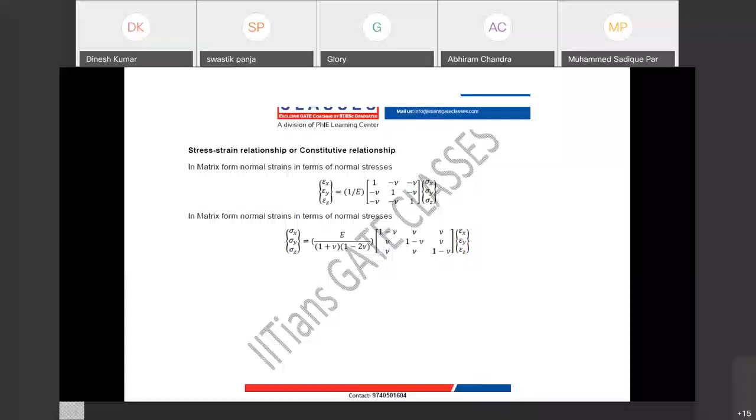Okay, so let's start with a simple topic: stress strain relationship. How many of you are aware of the stress strain relationship, guys? All of you know Hooke's law. What is Hooke's law, guys? Yes, stress is proportional to strain, right? Like sigma is proportional to epsilon. But where is it applicable? It is for 1D loading.

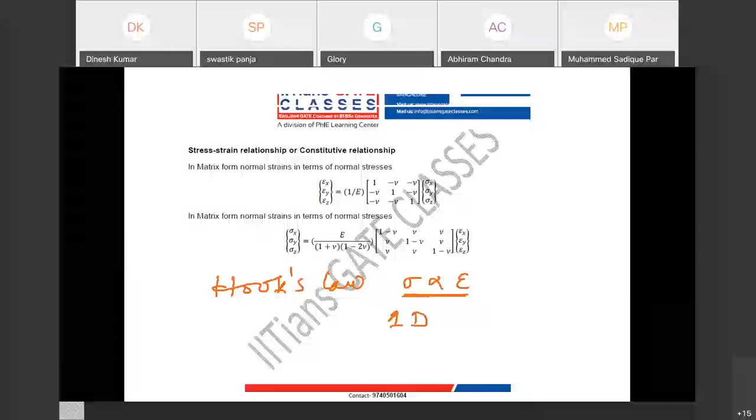Am I correct? From here we find sigma is equal to E times epsilon, right? So what is E here, guys? We are talking about the stress-strain relationship for isotropic material, because from this simple concept they have asked questions many times. Yes, Young's modulus. It's known as Young's modulus or modulus of elasticity. But as I said, this Hooke's law is applicable only for 1D loading.

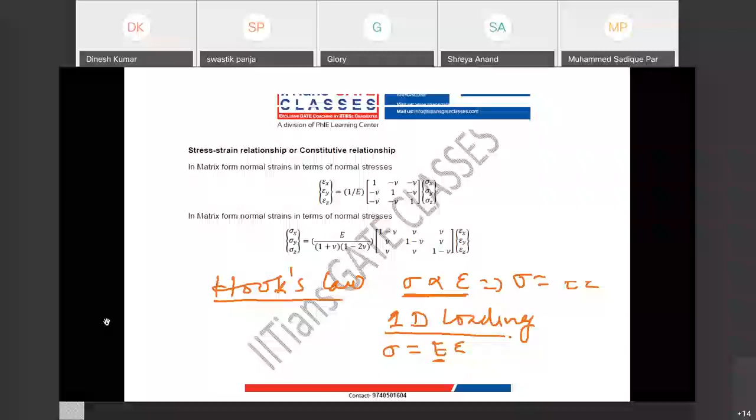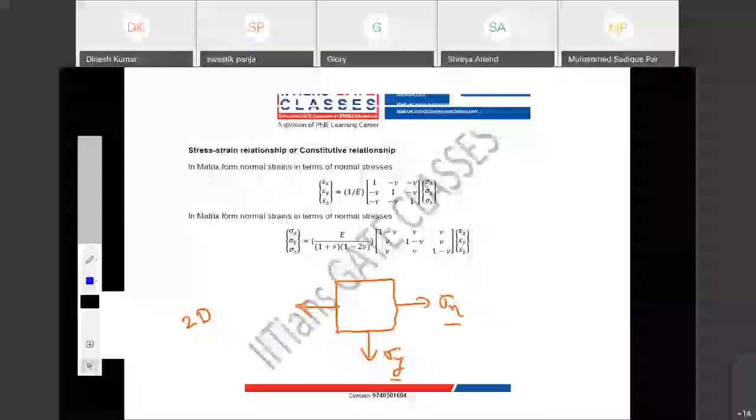Now suppose you have two-dimensional or three-dimensional loading. Then tell me, can we apply Hooke's law? Can I say my stress is directly proportional to strain? Anyone? Abhiram Chandra. No, you cannot, right? I will take one two-dimensional case. Suppose I have one plate subjected to stresses sigma x and sigma y. So I have two stresses, sigma x and sigma y. It is a two-dimensional stress system.

Now in this case, tell me, guys, what will be your strain? Suppose I want epsilon x. Will it be sigma x upon E? Because from Hooke's law, this is what your strain should be. But is it the case? Anyone? Yes or no? No, it is not the case. My strain will be sigma x by E minus nu times sigma y by E.

So there is one additional term. What is the additional term? Due to my stress in the y direction, there is strain in the x direction. Due to what? Poisson effect. Is this point clear? Due to the Poisson effect, I have one additional strain in the x direction due to loading in the y direction. Now tell me guys, why is it negative? Why is it not positive?

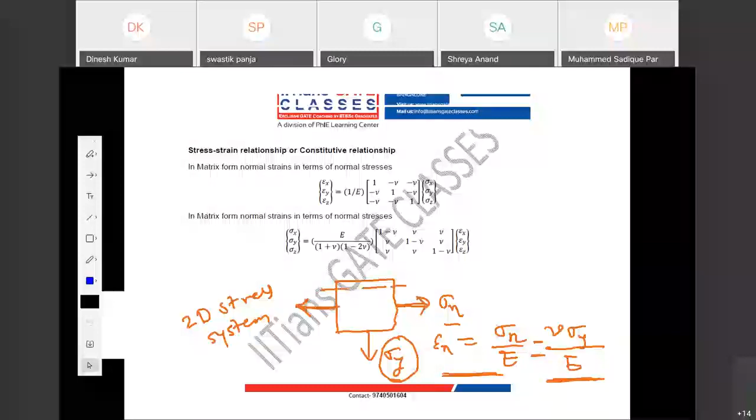Can you understand physically? See here, when I apply this sigma x, it will get extended. That means strain is developed. Now this sigma y will oppose this extension, right? Meaning contraction. So your strain is reduced when sigma y is present. That's why you can see the negative sign here. Is this point clear?

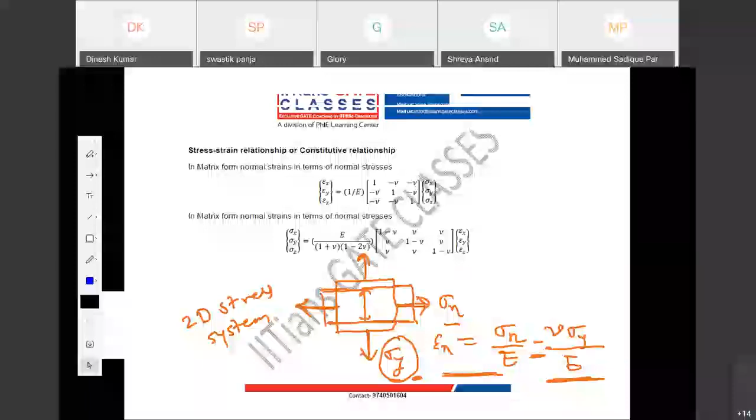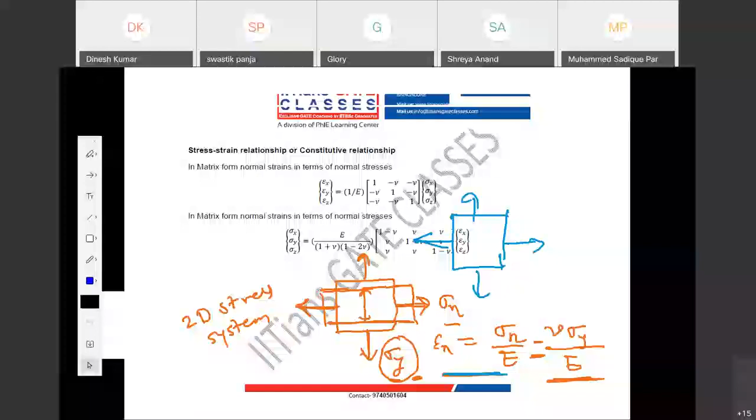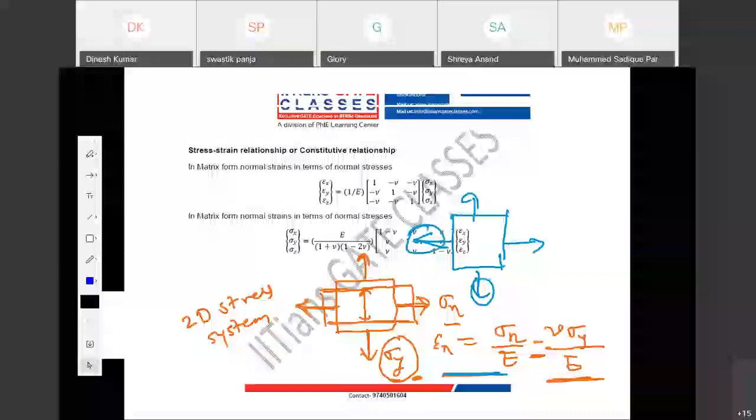So physically also we can understand: when there is a plate subjected to stress in two directions, your strain in one particular direction will be less than if it were subjected to 1D loading instead of 2D. Right? Because this guy is restricting motion in the x direction. So this is our physical understanding of why the negative sign is present here.

So this is how we derive the stress strain relationship for a 2D stress system. This is your epsilon x. Now tell me guys, what is your epsilon y? My epsilon y will be sigma y by E minus nu times sigma x by E. Is it clear?

Is it clear or not, guys? Quickly tell. See, guys, be interactive, okay? We are online, but still interaction must be there, okay? That's how we enjoy, okay?

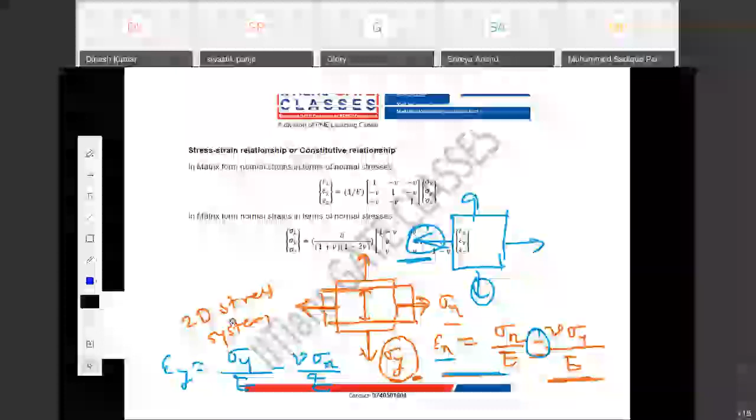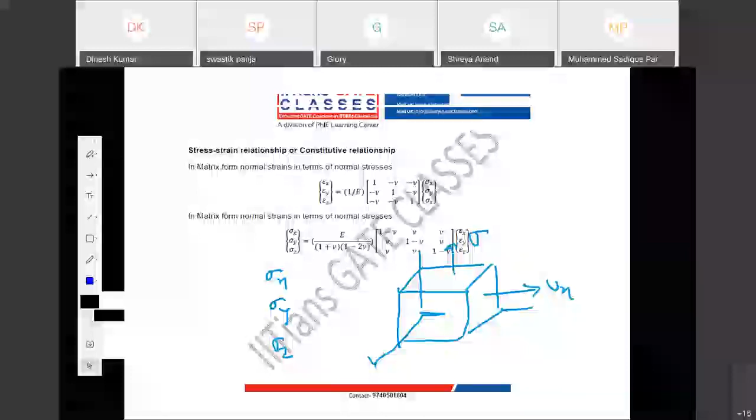So good. Now, this I talked about two-dimensional stress system. Now, suppose my stress system or my loading is three-dimensional, right? If my loading is three-dimensional, that means I have sigma x, I have sigma y, and I have sigma z. How can I visualize? If I take a cuboid, suppose here you have sigma x, here you have sigma y, and on this face you have sigma z, right? Is it clear? The loading part, is it clear, guys?

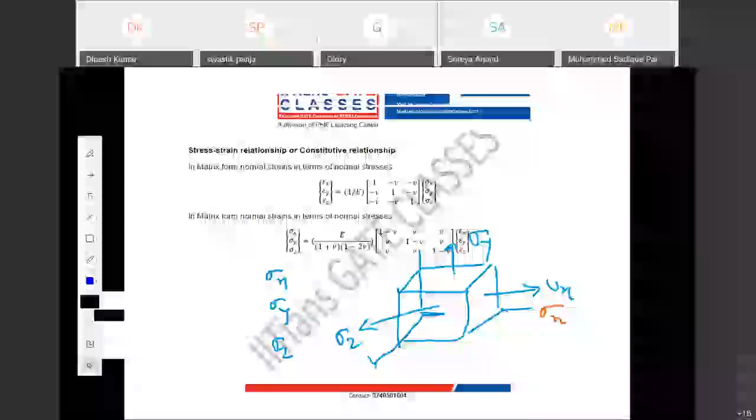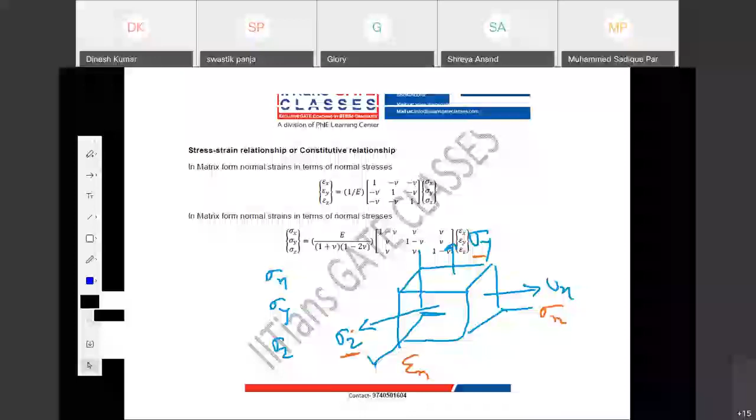You have one stress in x direction, sigma x, I can write here. Then you have sigma z and you have sigma y. Right. So in this case, what will be your epsilon x? It will be sigma x by E. Then due to Poisson effect, you have minus nu sigma y by E minus nu times sigma z by E. Is it clear? Is it clear or not, guys?

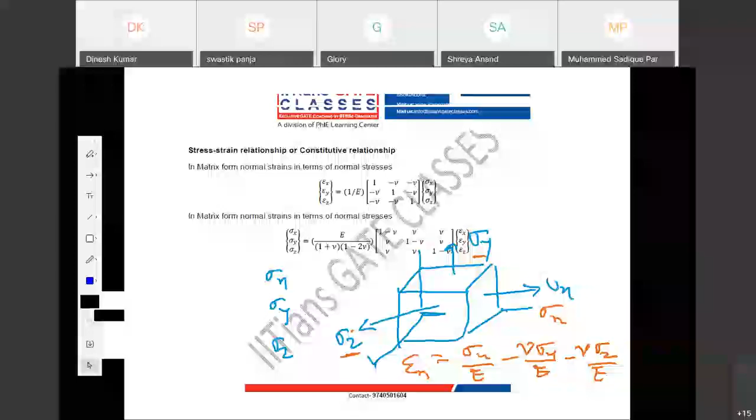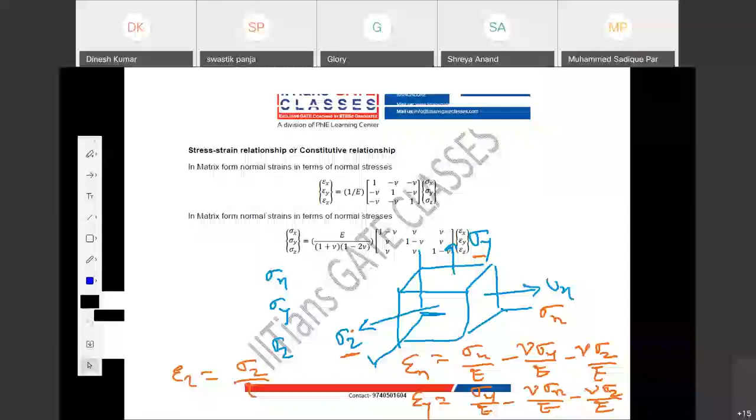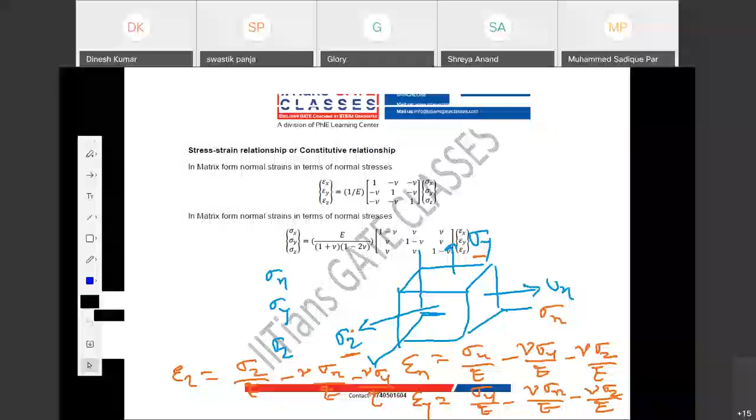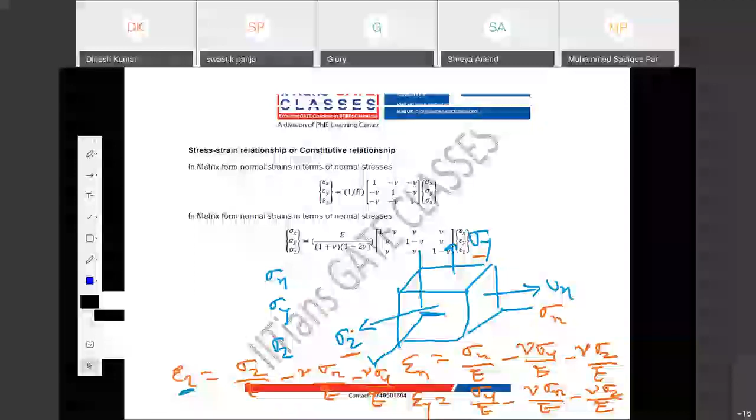Then similarly, I can write epsilon y, which is what? Sigma y by E minus nu times sigma x by E minus nu sigma z by E, and then I can write epsilon z, which will be what? Sigma z by E minus nu sigma x by E minus nu sigma y by E. Is it clear? So I have three strain terms, right? Epsilon x, epsilon y, epsilon z. I can write these three equations in a matrix form. Is it clear?

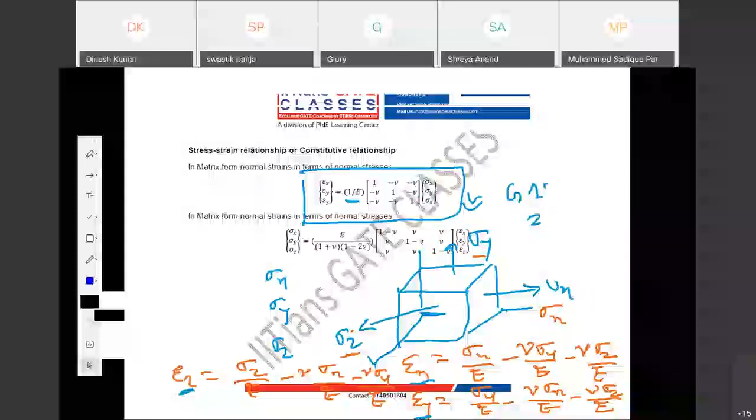1 by E can be taken out. So it is what? 1, minus nu, minus nu; minus nu, 1, minus nu; minus nu, minus nu, 1. Is it clear? Nu or mu is what? Poisson's ratio. So this form is easy to remember. In matrix form, we can easily remember. And in this form itself, in GATE 2020, they asked a question. We will solve that question, okay?

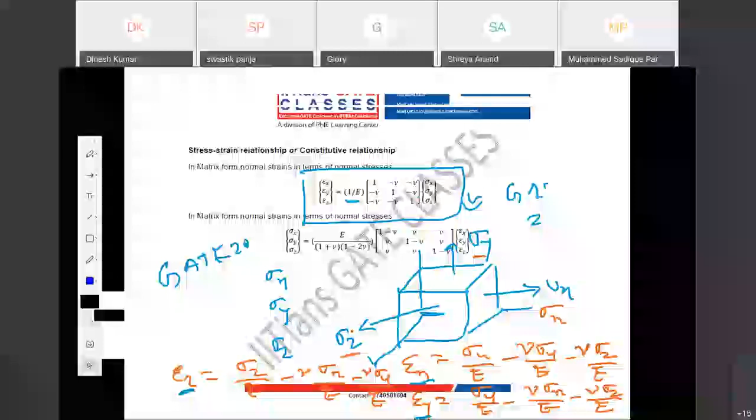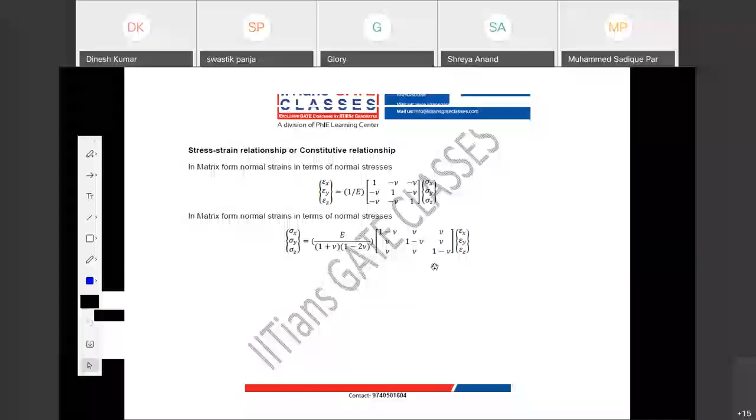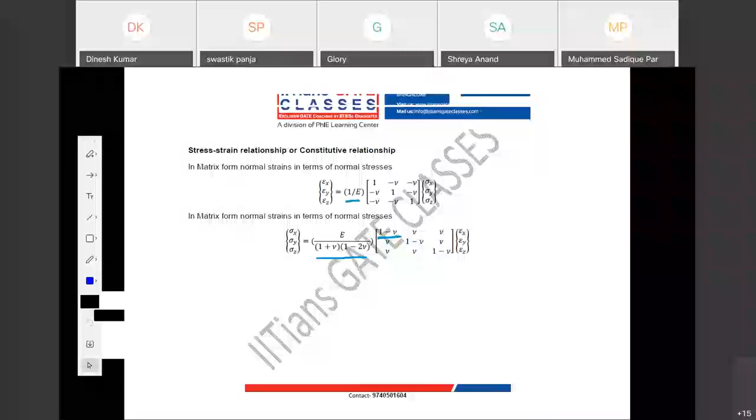Clear? Okay. Now, guys, here what I have done, I have written my strain in terms of stresses. You can write, by taking inverse of this matrix, stress in terms of strain. So both the forms are very important in GATE exam to remember. In this, it is 1 by E. Here, my constant is E upon 1 plus nu into 1 minus 2 nu. Then it can be remembered because again, it's a symmetric matrix: 1 minus nu, nu, nu; nu, 1 minus nu, nu, like that. Okay, so these are the two equations for stress-strain relationship and strain-stress relationship.

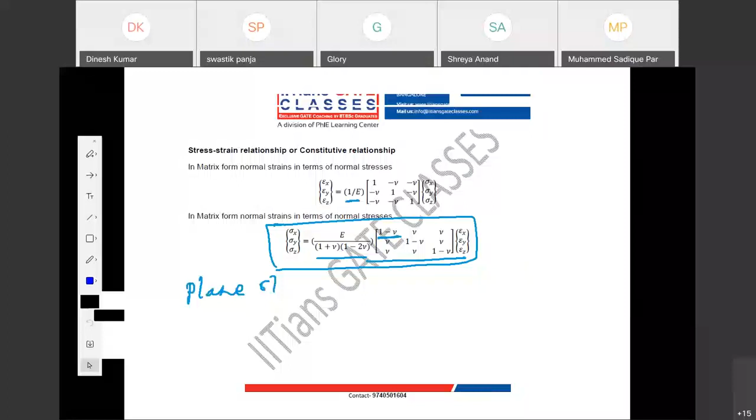So based on this, we have two concepts. One is plane stress problem, and one is plane strain problem. So we have seen questions from these two concepts in previous years' papers, as well as direct questions from this form. Okay, so we will take up those questions.

Before that, if someone asks, why do we study strength of materials or aircraft structures? Anyone? Why do we study this subject in our aerospace engineering? Can anyone answer? What is the significance or importance of this subject? To me, it is, guys, very simple. Your aerodynamics sir will give me loads. Surface loads and body loads.

Broadly, we can categorize loads in two forms. One is body forces and one is surface forces. So body forces are forces due to gravity, or forces due to inertia. What are surface forces? You have force due to pressure or you have shear stresses, right? So what I have to do as a structural engineer, I need to analyze for applied loads whether my structure is safe or not, or my design is satisfying my goal or not.

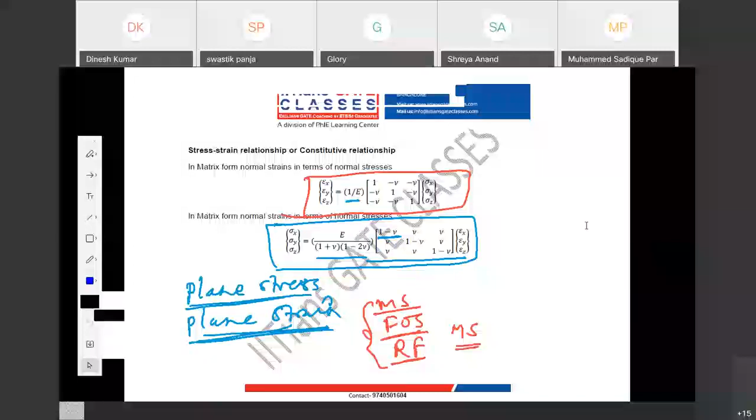Anyone have come across these terms? See, margin of safety is nothing but your FOS minus 1. Factor of safety minus 1 is what? Margin of safety. Yeah, you are correct, Jay Verma. And FOS has to be always greater than 1, or your reserve factor should be always greater than 1. But your margin of safety has to be greater than 0. Okay, so this is the difference.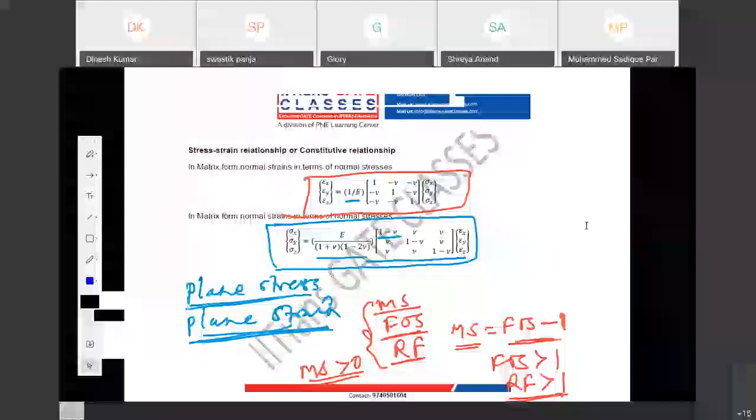Different companies use different notation. So the whole idea to study this subject is to always find margins. Clear? Always check your structure is safe. How do we find safe? We compare our maximum applied loads or maximum stresses, like you might have heard about von Mises stress and principal stress. So we compare this quantity against what? Material allowable. And we find the margins. Clear?

Now here we are discussing stress-strain relationship or strain-stress relationship. So I told from this there are two conditions: one is a plane stress problem and another is plane strain problem. One more thing, guys, we have seen these relations are between normal stresses and normal strain. But there is something called shear stresses and shear strain also, right?

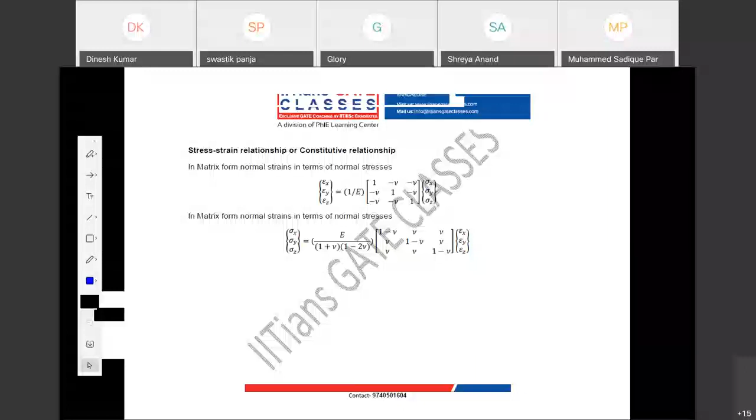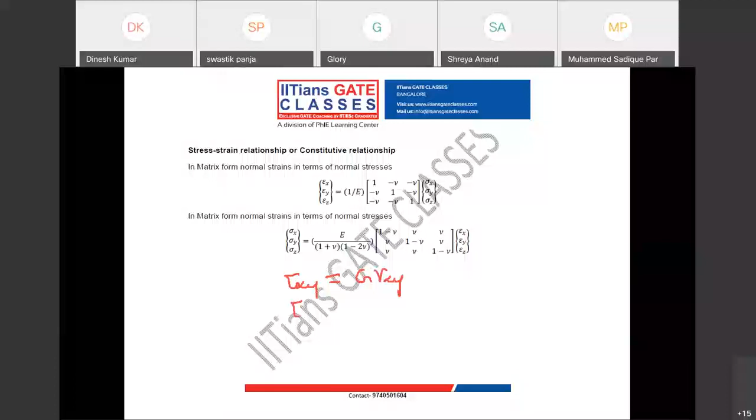So what is the relation between shear stresses and shear strain? What is your tau xy? It is G into gamma xy. What is your tau yz? It is G into gamma yz. What is your tau zx? It will be G into gamma zx. Now what is the G here? Yes, it's a shear modulus.

And we are going to derive this relation between shear stresses and shear strain when we start our class. But what is the relation between G and E? G is E upon 2 into 1 plus nu. Do you guys know this relation? G equal to E upon 2 into 1 plus nu. This again we will derive when we start our real class. Here my idea was just to give you the essence and see how GATE questions are.

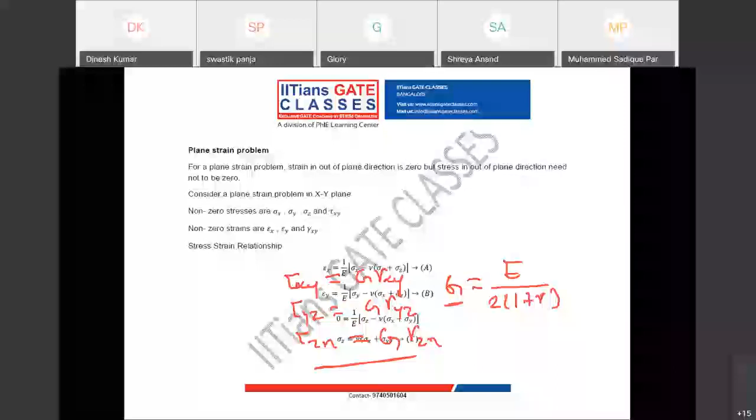Now, based on this, I will solve one previous year's question. Look at this question. This question is from GATE 2020. Can you try this question now? I have already given you in matrix form normal strain to normal stress, and we can also write shear strain to shear stress. So tell me, what is A here? Anyone? Don't be afraid, just think.

A is 1 by E. So we know what is epsilon x. Epsilon x is sigma x by E minus nu times sigma y by E minus nu times sigma z by E. Correct? Yes or no? So what is your A? A is 1 by E. What is C? It is minus nu by E.

Now what is B? B is 1 by G. Because we know gamma xy is tau xy by G. So B is 1 by G, and with G as we have written, B is 2 into 1 plus nu by E. Am I correct? Yes or no, guys? Quickly tell. What do I need to repeat?

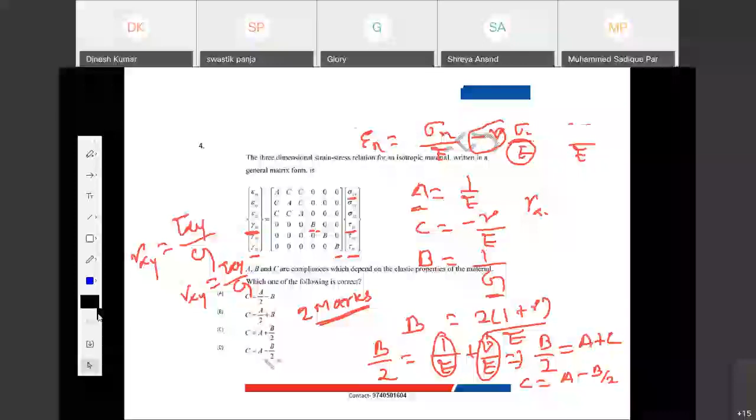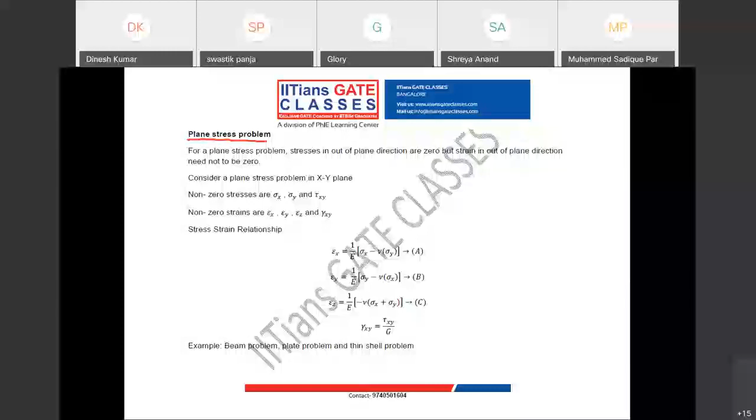Right. So let's go back to the stress strain relationship, and I told you the application of the stress strain relationship we use in plane stress problems. So can anyone tell me what is the plane stress problem? What is the plane stress problem? Anyone? No. A 2D problem can be plane stress, it can be plane strain also. We have to be very specific about plane stress problem. So plane stress problem means what?

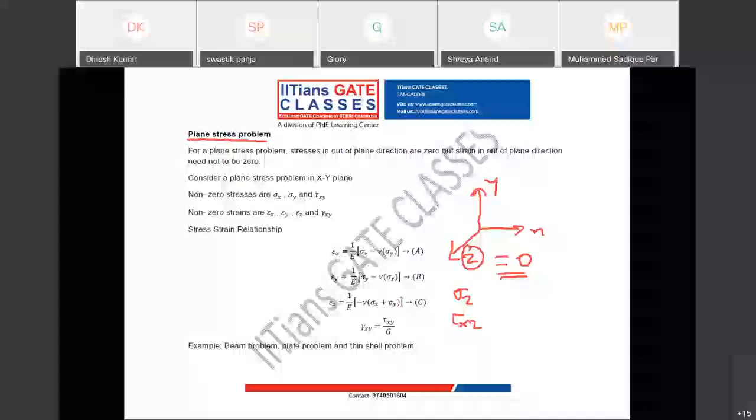You can have three directions, right? X, Y, and Z. If my stresses in Z direction are 0, what stresses can you have in Z direction? One is sigma Z, then you can have tau XZ, and you have tau YZ. If all three are 0, then it is known as a plane stress problem in the XY plane. Clear? Because in this case you have non-zero stresses only in the XY plane. So this is known as a plane stress problem in XY plane. Is my voice clear? Okay, so is this clear, what is the plane stress problem?

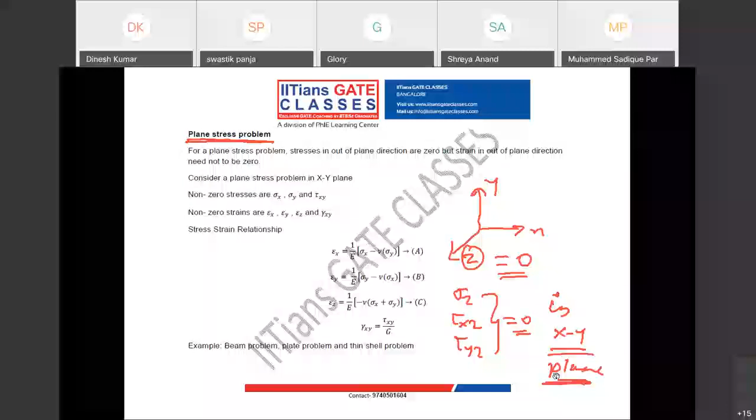Now your aircraft is a thin walled structure. So in your thin walled aircraft structures, we always have plane stress problems. We will not have stresses along the thickness direction. We will neglect stresses along the thickness direction. You will have your stresses in plane, because if you take the in-plane direction as the XY plane, then you will not have these three.

Now guys, suppose my plane is YZ, and X is perpendicular. So in this case, suppose your sigma X, tau XY and tau XZ are 0. Now tell me guys, this problem is a plane stress problem in what plane? Yes, it is a plane stress problem in YZ plane. You are very correct. That's good.

Now guys, tell me, for a plane stress problem in YZ plane, will you have epsilon Z 0 or non-zero? Anyone? 0 or non-zero? Yes. So what we are saying, for a plane stress problem, you can have epsilon Z, the strain in Z direction, non-zero. From where? We can see it from the stress strain relationship. My stress in X and Y direction produces strain in Z direction.

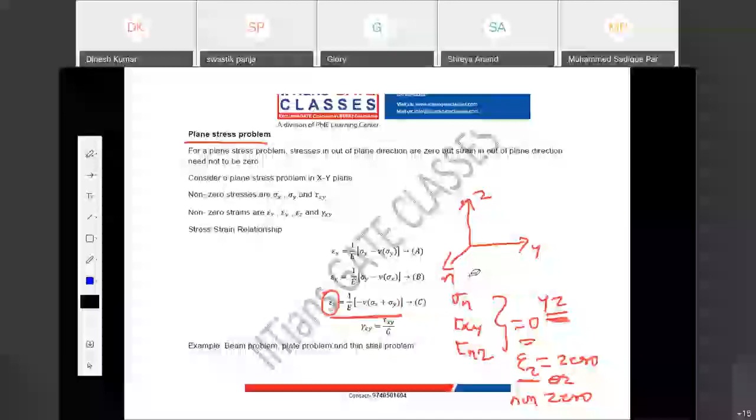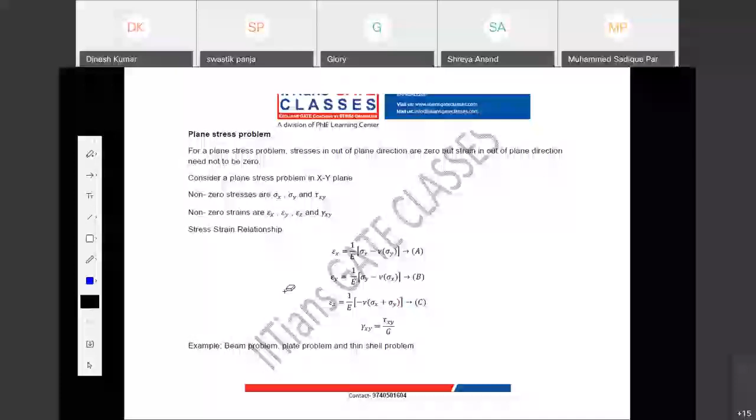Clear? Actually here, since the plane was YZ, I should have said epsilon X, because here the perpendicular direction is X direction. But if you consider the XY plane, what is your epsilon Z?

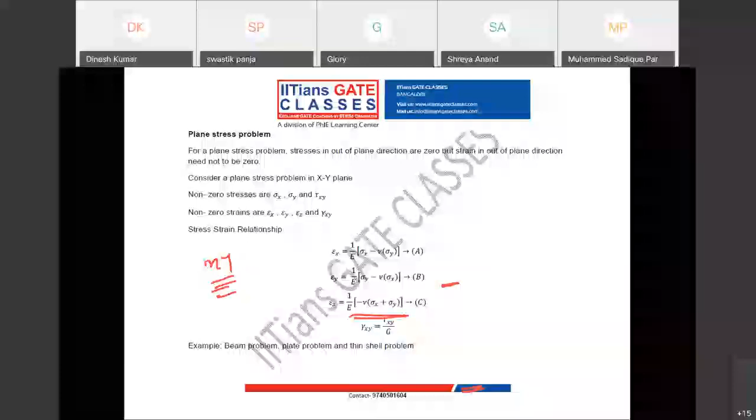Your epsilon Z from the stress strain relationship will be given by this equation, right? So though it's a plane stress problem or a 2D problem, you have epsilon z due to what? Poisson effect. So what is it? It is minus nu by E times sigma x plus sigma y. Is it clear? Is this clear to everyone?

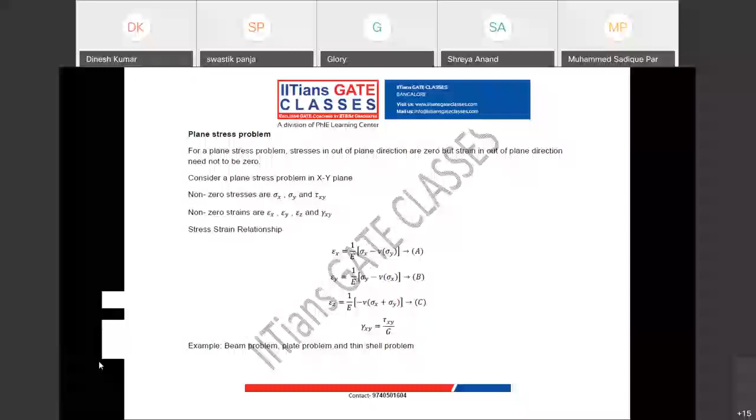Okay. Now, what is the application of plane stress problem? There are many applications of plane stress problems. One is our thin walled structure, aircraft structure. Now you can see, beam problems, your thin shells, right? Spherical shells, cylindrical shells, all these are plane stress problems.

Now, once you know the plane stress problem, the next concept is the plane strain problem. So what is the plane strain problem, guys? Now tell me. What is the plane strain problem?

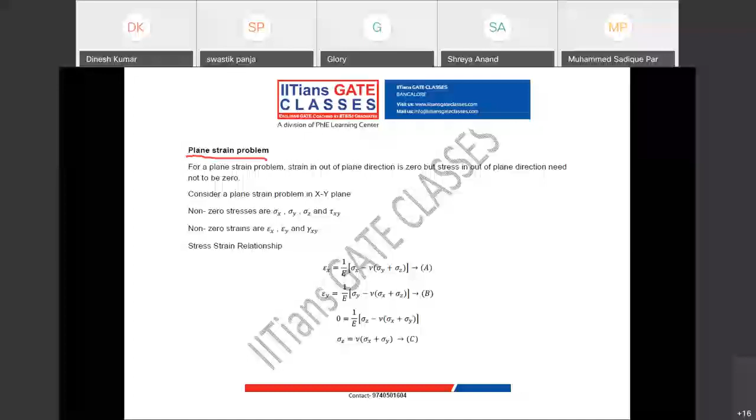Anyone? In plane strain problem, what will happen? You will not have strain in perpendicular plane. Suppose this is my xy plane, then my epsilon z, gamma yz, gamma xz will be what? 0. But your sigma z may not be 0. Is it clear? Your strain in perpendicular direction will be 0, but stress may not be 0. How? Again, it is from stress strain relationship.

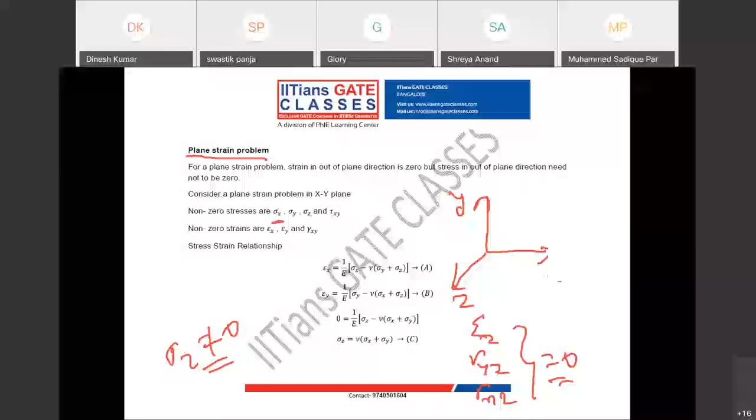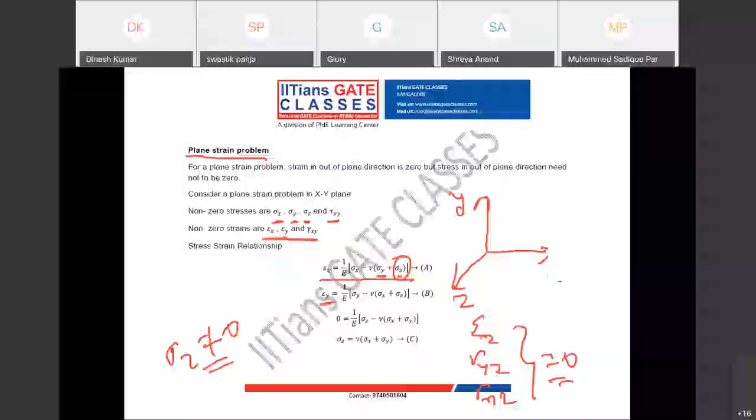So non-zero stresses can be sigma x, sigma y, sigma z and tau xy, but non-zero strain will be only in plane, which is epsilon x, epsilon y and gamma xy. Now see your stress strain relationship. Epsilon x is 1 upon E into sigma x minus nu times sigma y plus sigma z. As of now, I don't know about sigma z. Epsilon y is 1 upon E into sigma y minus nu times sigma x plus sigma z. But I don't know about the sigma z part. Is it clear? Now, how do I know about sigma z?

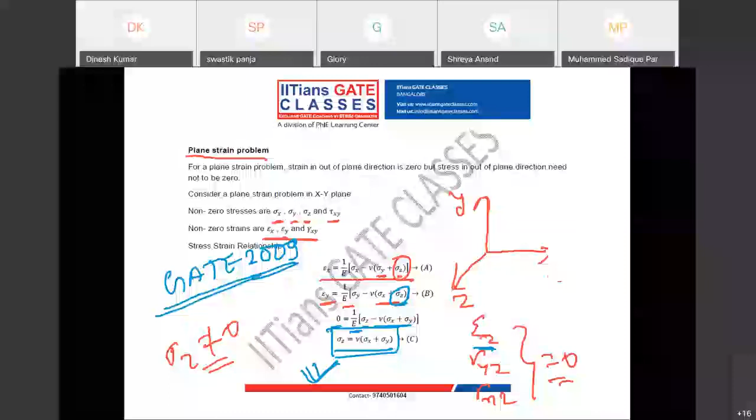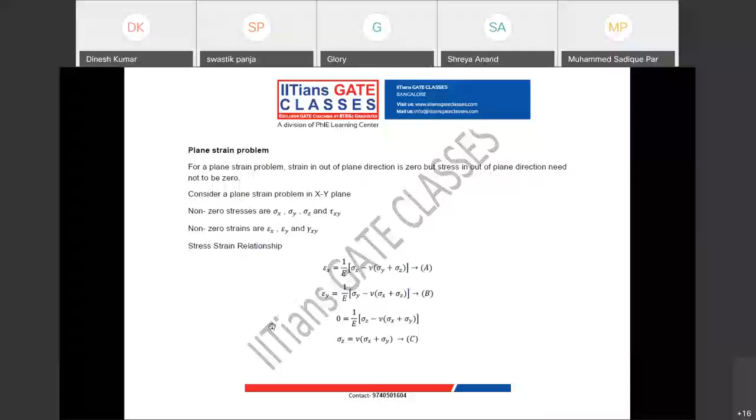What is your epsilon z? It is 0. So 0 equal to 1 upon E into sigma z minus this term. So from here we get sigma z equal to nu times sigma x plus sigma y. Now, this is one of the GATE questions, and it came in GATE 2009, the year in which I appeared. Let's see that question, guys. Can you see this question? Read it and give me the answer.

What is the answer, guys? See, in plane stress problem, stresses will be 0 in perpendicular direction. What is your doubt, Abhiram? Is it the same in plane stress problem? Stress in perpendicular may not be 0. The plane stress problem itself says your stresses in perpendicular direction are 0. That is the condition. The definition of plane stress itself says your stresses in out of plane directions are 0. But you can have non-zero strain, which is epsilon z, if your plane is xy plane. Is it clear, Abhiram?

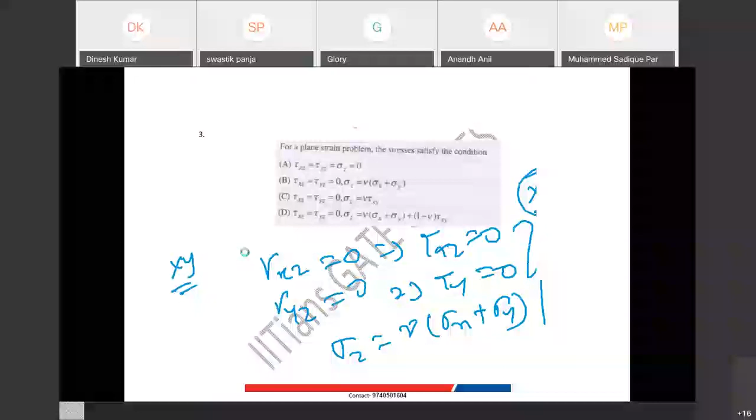Now, let's look at one more question. Look here, these two easy questions. First question you can leave, because we haven't discussed anisotropic material. Tell me the answer for question number 2. For a plane strain problem in XY plane, in general, the non-zero stresses are what? We know sigma XX, sigma YY, sigma ZZ, and sigma XY. So which is the correct answer? I need to zoom it. So D should be the answer. Why C? Someone has told C is the answer.

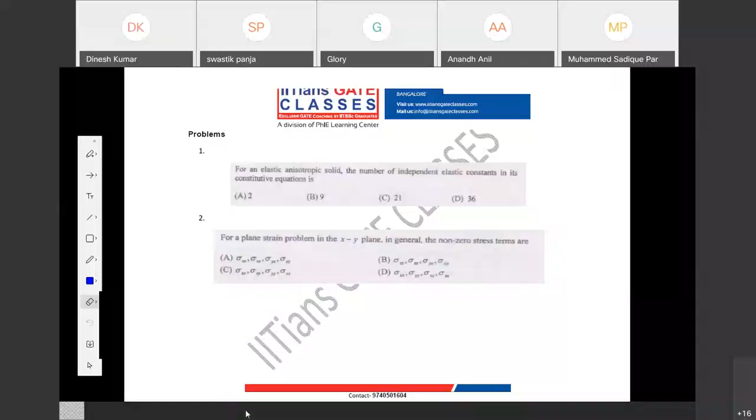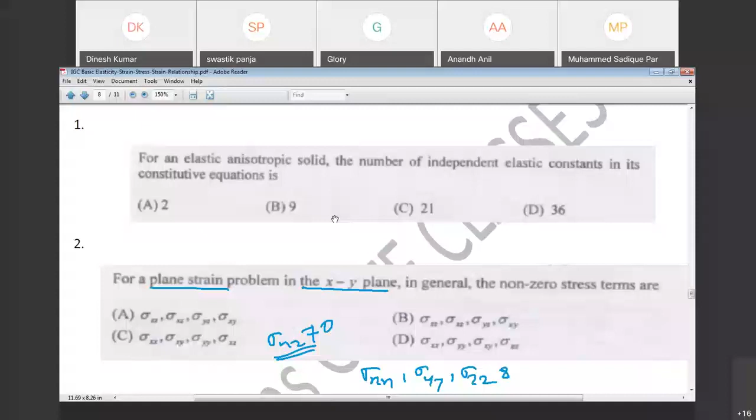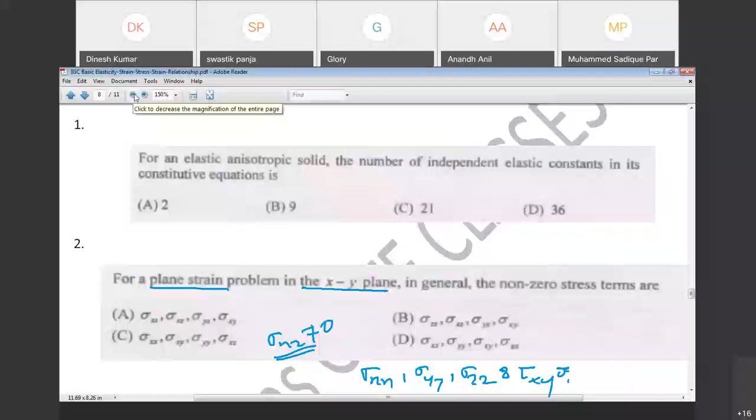Let me zoom this. One moment. Tell me the answer, guys. What are the non-zero stresses for plane strain problem in XY plane? Abhiram, do you think sigma xz is non-zero? How is C the answer? Forget the answers. Tell me with your concept, what are the non-zero stresses? It is sigma XX, sigma YY, sigma ZZ, and tau XY, or sigma XY. Is it clear? Yes or no? So what is the answer?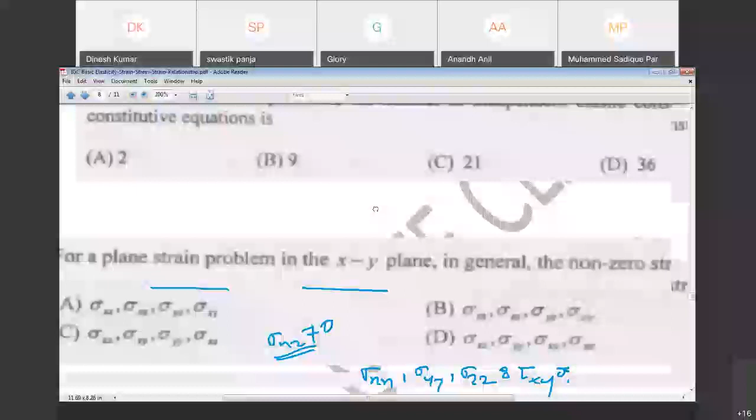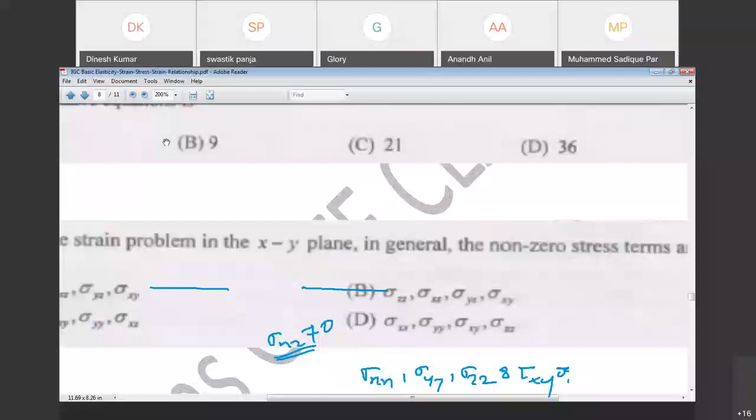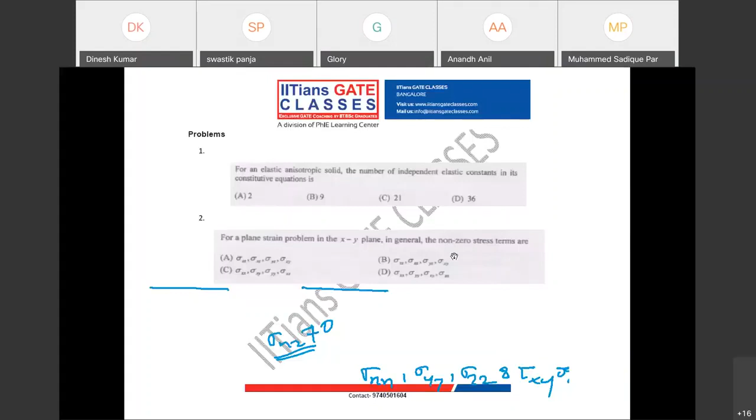Abhiram, what is the answer? D is the answer. You can see here sigma xx, sigma yy, sigma xy, and sigma zz. Here instead of tau they have written sigma. Either you can write tau or sigma, that doesn't matter. What matters is the subscripts i and j. If i equals j, then it is normal stress. If i is not equal to j, then it is shear stress. Finally, the answer is D. So that's it from my side for today's class.